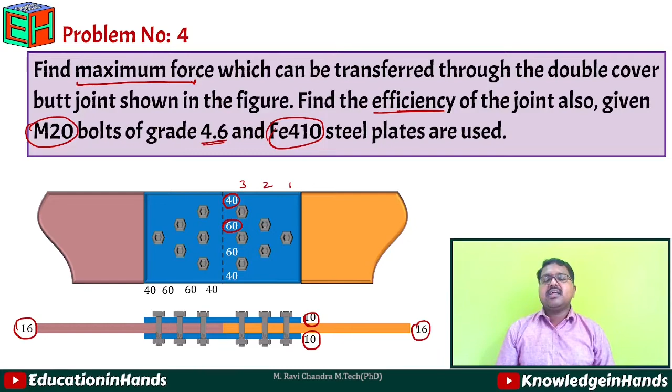So if we start with the given data, first if we consider the data given for the bolt is of M20 and 4.6 grade. So first M20 means diameter of the bolt d equal to 20 mm. So here the diameter, which is nothing but the shank diameter, is equal to 20 mm. So from this, bolt hole d0, if we calculate it, it is equal to d plus clearance C. So clearance we will get it from table 19 of IS 800. So for 20 mm bolt, clearance is 2 mm. So 20 plus 2, which is equal to 22 mm of diameter of hole.

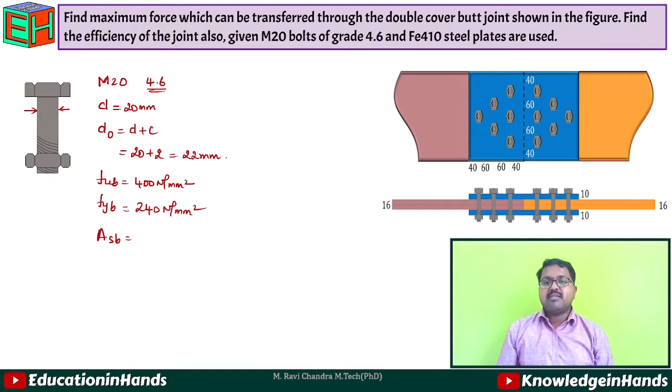Then it is of grade 4.6. So 4.6 grade means fub, ultimate strength of bolt, will be equal to 400 Newton per mm square and fyb will be equal to 240 Newton per mm square. And along with this one, we need to calculate the shank area, which is nothing but Asb. That will be equal to pi by 4 d square, which is nothing but 20 square. We will get it as 314.16 mm square.

And net tensile area Anb of the shank, which is at the threaded position. So the cross sectional area of the bolt at threaded position, which is equal to Anb, that is 0.78 times of Asb, which will be equal to 245.04 mm square. So this is the data regarding bolt. Now we need to see what are the data given for the plates here.

So if we see here, Fe410 steel plates are used, which is given in the problem. So with that one, if it is Fe410 plates, fu, ultimate strength of plate, will be equal to 410 Newton per mm square, and it is covered with 2 cover plates. And if we see the dimensions given here, edge or end distance will be equal to 40 mm and pitch or gauge distance will be equal to 60 mm from the figure. And along with this one, since it is a bearing type of connection, from table 5 of IS 800, we will get the value of gamma mb will be equal to 1.25 for both shop fabrications and field fabrications.

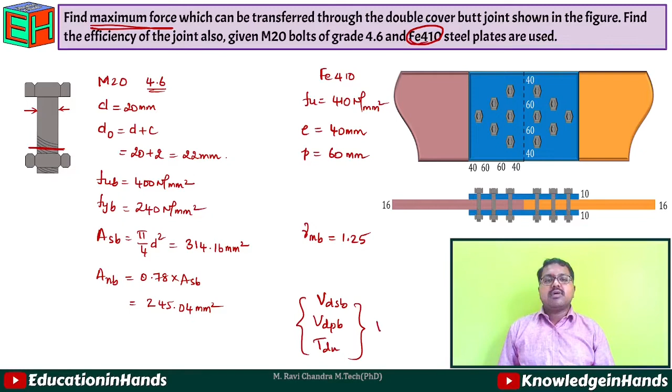So first, if we see the calculation for shear capacity, Vdsb equal to Vnsb by gamma mb, where Vnsb is nothing but fub by root 3 into (nn Anb plus ns Asb) into reduction factors. So first here there are no reduction factors, so we will take it as unity. And then if we see the number of shear planes, here it is a double cover butt joint.

So here we are having one shear plane at top and another shear plane in bottom. So we are having here two shear planes. So we will take these two shear planes in nn. So nsAsb will become 0 and Vdsb will be equal to fub by root 3 gamma mb into nn into Anb. So which will be equal to 400 by root 3 into 1.25 into nn is 2 into Anb is

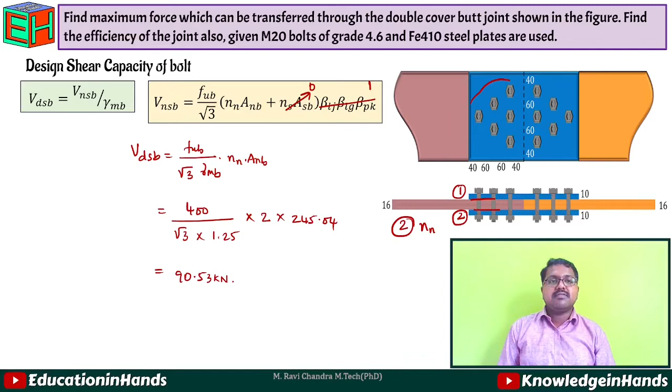245.04. So from this we will get the value of Vdsb for single bolt as 90.53 kilonewtons. But we need to get the value of Vdsb for 6 bolts in each side. So Vdsb for 6 bolts, that will be equal to 90.53 into 6. That is equal to 543.26 kilonewtons. So this is the value for Vdsb.

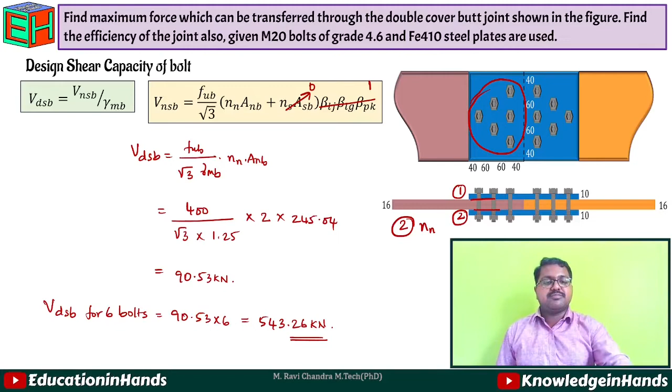Next, if we see the design bearing capacity for the bolt, which is Vdpb, that is equal to 2.5 kb d t fu. We need to find the value of kb first of all. So we know that kb is the minimum of e by 3d0 or p by 3d0 minus 0.25 or fub by fu or 1.0. So least value of these 4 will be taken for the value of kb.

So first here e by 3d0. Here e is nothing but 40 and p is nothing but 60. So e by 3d0, that is equal to 40 by 3 into d0 is 22, which will be equal to 0.606, and p by 3d0, that is 60 by 3 into 22 minus 0.25 will be equal to 0.65. Then fub by fu, that is 400 by 410, which will be equal to 0.97. So out of these 4, 0.606, 0.65, 0.97 and 1, least is 0.606. So the value of kb will be equal to

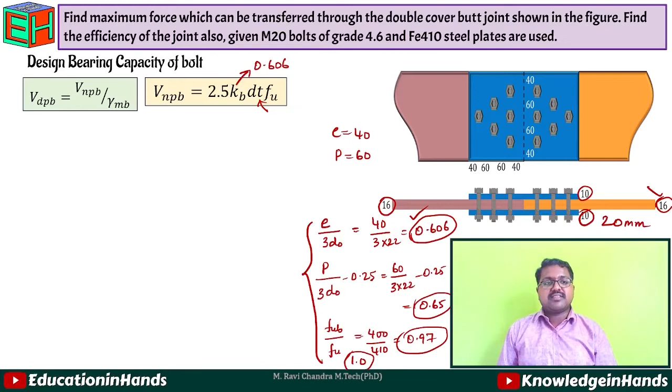0.606. And t value, here if we calculate, each plate is of thickness 16 mm and cover plates are of thickness 10 mm. So both the cover plates combined together means we will get 20 mm. So the least thickness is thickness of the main plate, that is 16 mm. So t equal to 16.

So Vdpb will be equal to 2.5 kb d t fu by gamma mb. So this will be equal to 2.5 into kb value 0.606 into d, that is the diameter of bolt 20, into t, thickness of the plate, that is 16, into fu, which is nothing but 410 Newton per mm square, by gamma mb 1.25. So here we will get the value of Vdpb as 159.01 kilonewtons. So this is the Vdpb value for 1 bolt.

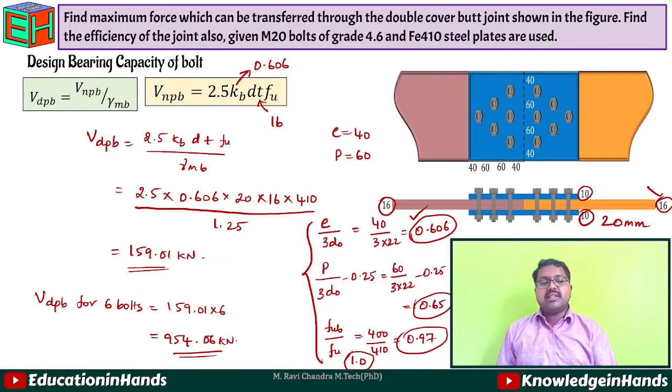If we see the Vdpb for 6 bolts, it will be equal to 159.01 into 6, that is nothing but 954.06 kilonewtons. So this is the value of Vdpb for 6 bolts. The next we need to find the value of Tdn.

So in the case of calculation of Tdn, here we are having a diamond bolting pattern, which means if we want to calculate at the section 1-1, Tdn value will vary at the section 3-3. So we need to calculate at each and every section Tdn value. Why? Because in first section we are having only 1 bolt, in second section we are having 2 bolts, in third section we are having 3 bolts. So we need to calculate the value at all these 3 sections, and we need to select minimum of these values. So first, now I am considering the design tensile strength of plate at 1 section.

So for 1 section, I am using the same formula from 6.2, where Tdn equal to 0.9 fu An by gamma m1, where An we will get by using the formula b minus n d0 into t. So here if we see this formula for the calculation of An, b is nothing but the width of plate. So here 40 plus 60 plus 60 plus 40. So total it is b equal to 200 mm. So 200 minus, at section 1 only 1 bolt, 1 into d0, that is 22, into t, thickness of the plate is 16. So we will get the value of An as

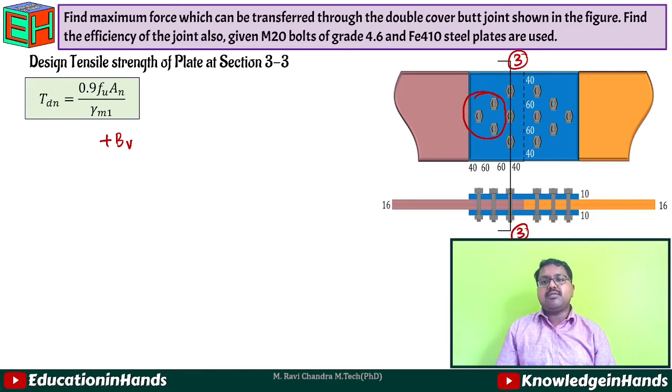Now the last section, cross section 3-3, we will take the TDN value at 3-3. So here also we need to calculate the value of TDN, and then we need to add the bolt values before this section. Here we are having 3 bolts before this section, so we need to add bolt value of 3 bolts. First, AN value, that is 200 width minus number of bolt holes at section 3-3, 3, into diameter 22, into thickness 16. So we'll get the value of AN as 2144 mm square.

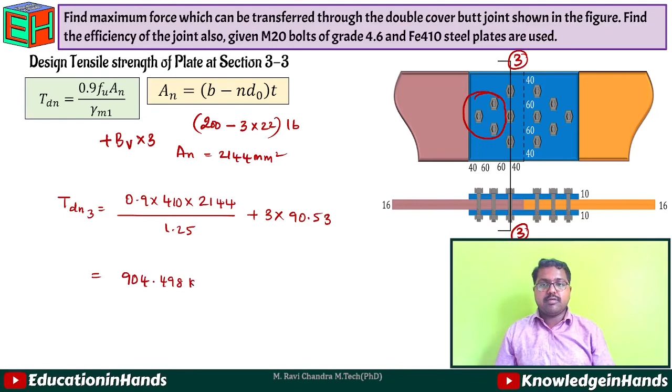So now TDN3 will be equal to 0.9 into FU, that is 410, into AN, that is 2144, by gamma M1, that is 1.25, plus 3 into bolt value, which is 90.53 kilonewtons. So we will get the value of TDN3 as 904.498 kilonewtons. So now out of these 5, VDSB, VDPB, TDN1, TDN2 and TDN3, the least value will be taken as the strength of joint. Here the least value is VDSB, which is equal to 543.26. So we'll take this value as VDB, the strength of the bolted joint.

So this strength of the joint, 543.26 kilonewtons, is itself the maximum force that can be transferred through this double cover butt joint. Therefore, maximum force transferred in the connection is 543.26 kilonewtons. This is our first step answer. Next, we need to calculate the efficiency of this joint. For efficiency, we use the formula VDB by TDG, that is the strength of joint by strength of solid plate into 100.

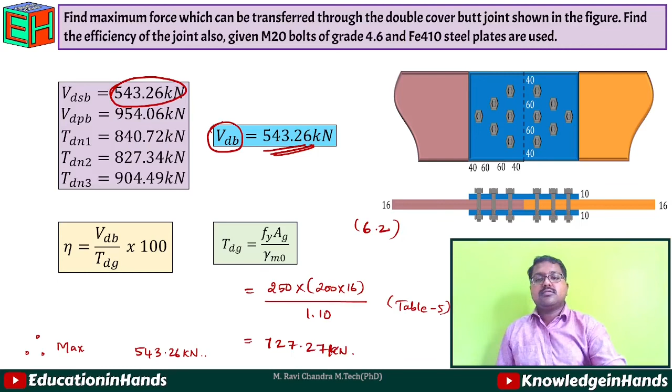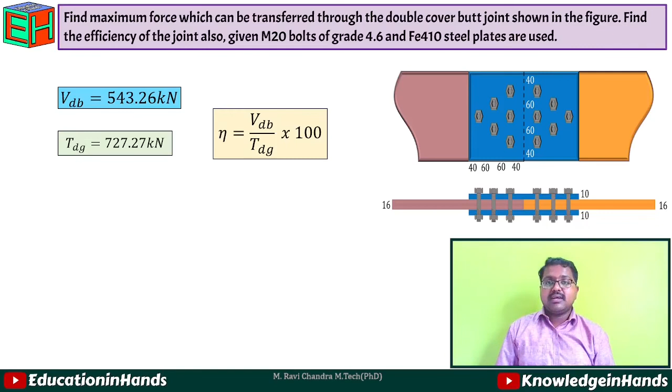The strength of solid plate we can calculate using the formula TDG from clause 6.2 of IS 800 as Fy into Ag by gamma M0. Here Fy is 250, Ag is width 200 into thickness 16, and gamma M0, obtained from table 5 of IS 800, is 1.10. So we will get the value of TDG as 727.27 kilonewtons. So the efficiency of this joint is VDB, 543.26 kilonewtons, by TDG, 727.27 kilonewtons, into 100, which will give efficiency eta as 74.69%.

So this is the calculation of maximum force which can be transferred in the joint as well as efficiency of the joint for a diamond type of bolted connection. If we review this, the major difference from chain bolting is we need to calculate the TDN, the tensile strength of plate at different sections. That's it for this problem. Next video we will see staggered type of bolting efficiency calculation.